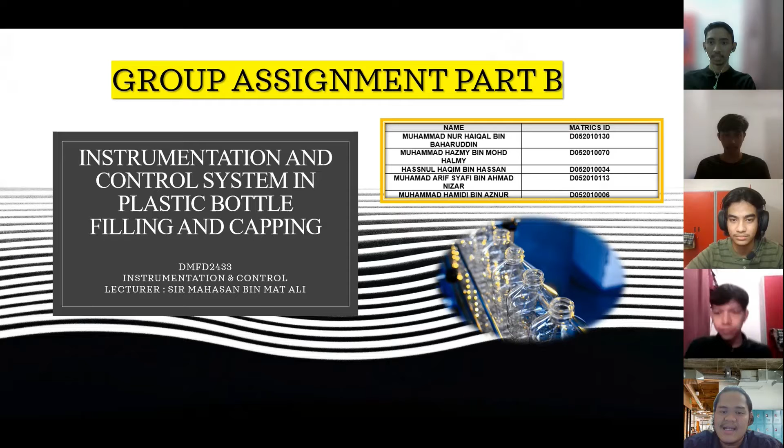We're going to page 1, table of content. First is problem description. Second, we'll talk about detail of proposed instrumentation. Third, predictive maintenance planning.

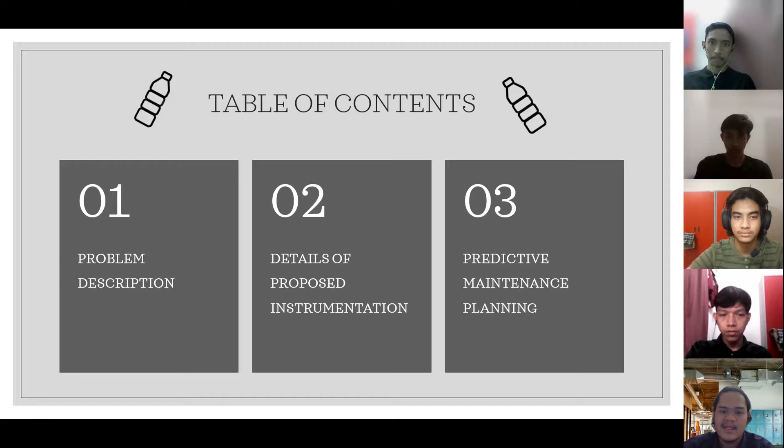First is problem description. Nowadays, automation in industry is necessary for accurate and fast production.

Let's take an example of soda bottle companies, where the belt conveyor is used for transferring the bottle from one station to another. We move the bottle from empty bottle to the station, but before the bottle reaches the soda filling station, it is necessary to make sure all bottles are in standing position for further processing, so the bottle doesn't drop and is standing in the right position on the belt conveyor.

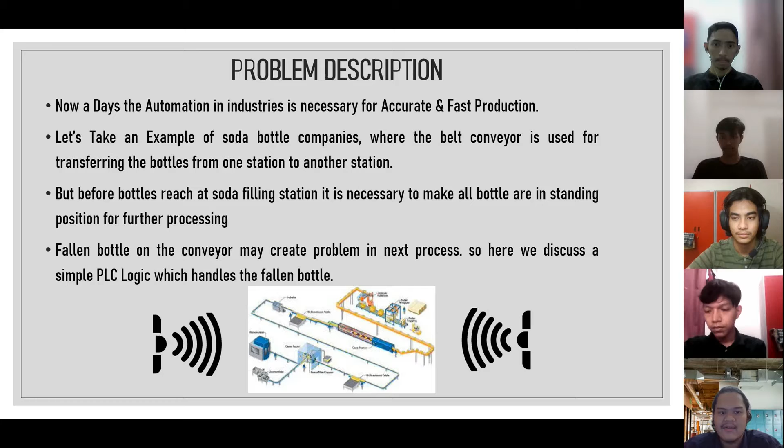Fallen bottle on the conveyor may create problems in the next process. So here we discuss a simple PLC logic which handles the fallen bottle. This is the problem description.

Next we go into detail of proposed instrumentation. For that we are using a PLC system at the filling station which rejects the fallen bottle from the conveyor and clears the path for the next process.

As you can see in the figure, there is sensor 1, sensor 2, and a cylinder that pushes the dropped bottle down, while the standing bottle goes through the conveyor. This process is done using sensors and actuators.

We use a pneumatic piston cylinder assembly for pushing the fallen bottle from the conveyor. When the conveyor is running, all bottles transfer from one station to another.

For the next process, there are two sensors used for standing and fallen bottle detection, and one pneumatic cylinder for pushing the fallen bottle from the conveyor. The cylinder pushes the fallen bottle down into the box, and the standing bottle in the right position passes through the conveyor.

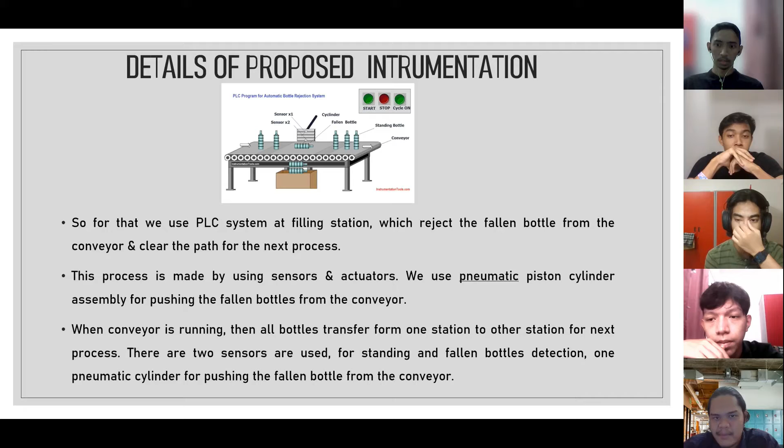Next I will pass to Hassnul Haqim. Next is detail of proposed instrumentation. The first figure is the principle of the PLC sensor.

Sensors are devices that either measure or detect a physical quantity. A sensor in PLC automation must be a transducer capable of converting a physical amount into an electrical quantity. It's critical to understand there's no one-size-fits-all sensor. As engineers, we must handle PLC automation difficulties using appropriate devices, starting with monitoring the physical circumstance in the system, and understanding what elements to consider when selecting a sensor.

For figure 2, the diagram of the system: after pressing the start push button, bottles move on the conveyor belt. The number of bottles passing through the conveyor is counted by proximity switch 1 and proximity switch 2.

The scanner detects the faulty bottle by providing an input pulse. When the scanner detects a faulty bottle, the process calculates the faulty bottle number using the values of proximity switch 2 and proximity switch 1.

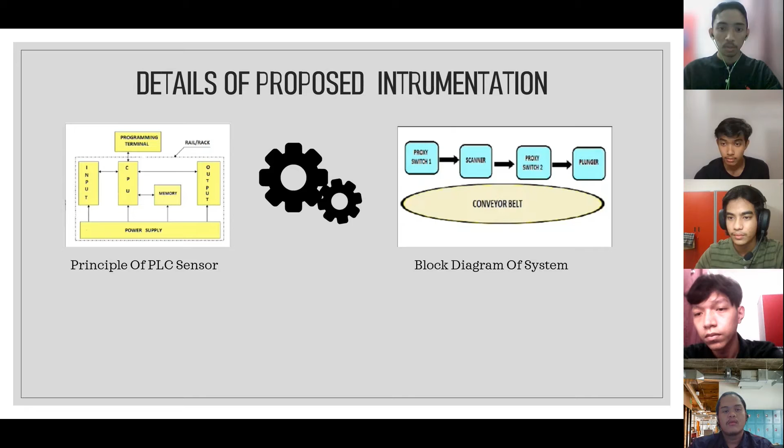Proximity switch 2 checks for the faulty bottle in front of it. When proximity switch 2 detects that faulty bottle, the plunger actuates and pushes the bottle from the main conveyor to the second conveyor. When we press the stop push button, the entire process resets.

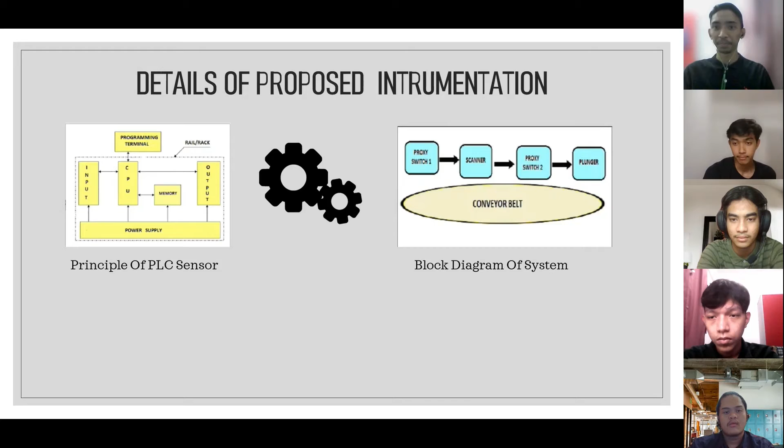Next is predictive maintenance planning about our program. Predictive maintenance is a strategy that employs data analytics to spot abnormalities in an operation.

It identifies potential problems in equipment and processes so they may be fixed before they fail. In theory, predictive maintenance allows the maintenance frequency to be as low as feasible, avoiding unforeseen reactive maintenance while avoiding the expense of performing too much preventive maintenance.

Predictive maintenance anticipates issues using historical and real-time data across many sections of a business. It considers three major aspects of an organization: real-time monitoring of asset condition and performance, analysis of work order data, and benchmarking MRO inventory rate.

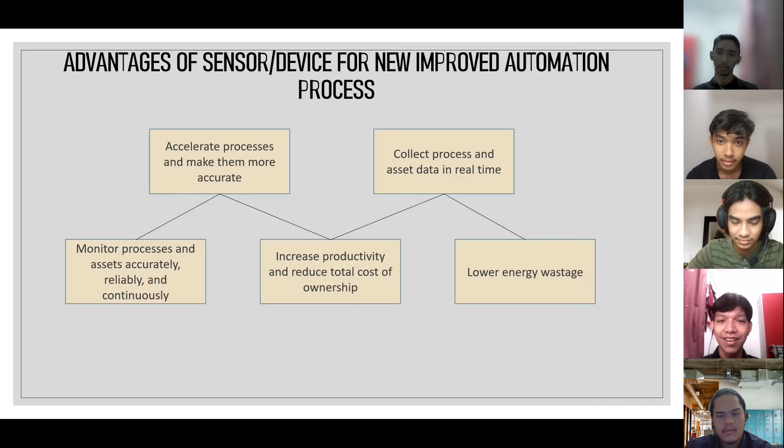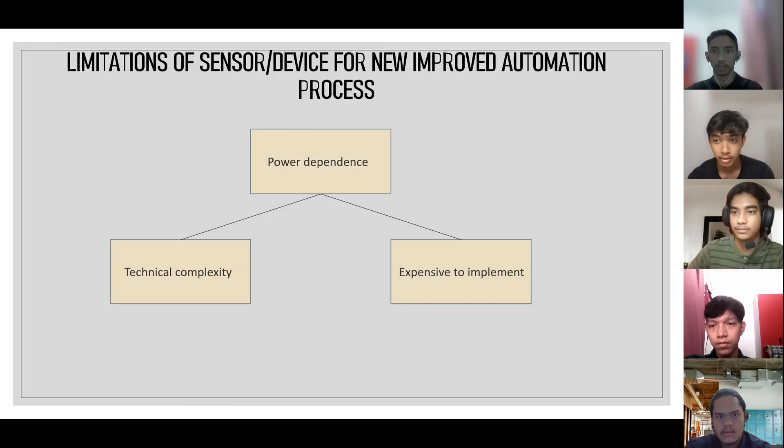Now I will continue with sensor maintenance. First, adjust alignment. If one of the parts is not aligned properly, it is critical to recalibrate and adjust accordingly. To perform this successfully, you will need the right measurement instrument. Calibration of an instrument is as simple as comparing one proper instrument to the one being prepared, using it as a standard for the rest.

Number two is keep it clean. Keeping all moving components clean is essential to ensuring they do their function appropriately. Make sure to clean any dirt and grease from the sensor at the end of the day, and take time to educate all workers and staff on the proper cleaning technique.

Number three is proper storage. When your tool is not in use, make sure it is properly stored, depending on its size and placement. This might involve dismantling it until you need it again, leaving it on a stable surface, or covering it with a tarp.

Number four is corrosion. Excessive corrosion can cause a machine part to wear out faster. If you cannot remove the rust on your own, consider hiring a professional or replacing the item totally. Also, keep moisture away from the instrument as much as possible to avoid it in the first place.